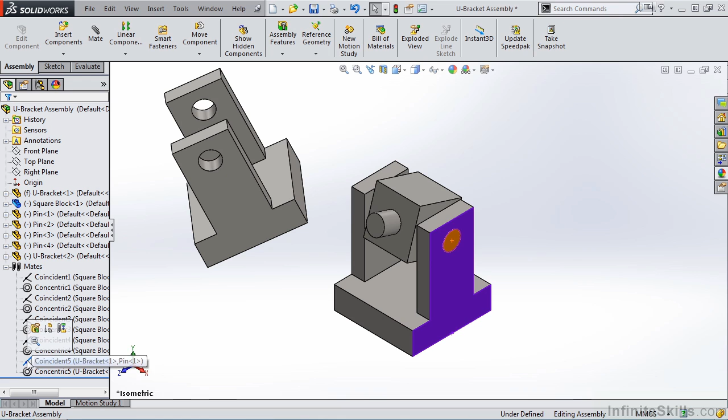If we expand the mates, you will see on the U-bracket, we have a coincident mate and a concentric mate. The coincident mate is mating the face of the pin and the face of the U-bracket. Let's suppress the coincident mate. Once we suppress it, the one mate we have remaining is the concentric mate.

So if I move the square block, notice we maintain the concentric mate. However, the coincident mate is suppressed. Now let's take a look at how to add a width mate. The width mate will allow this square block to stay centered within the legs of the U-bracket.

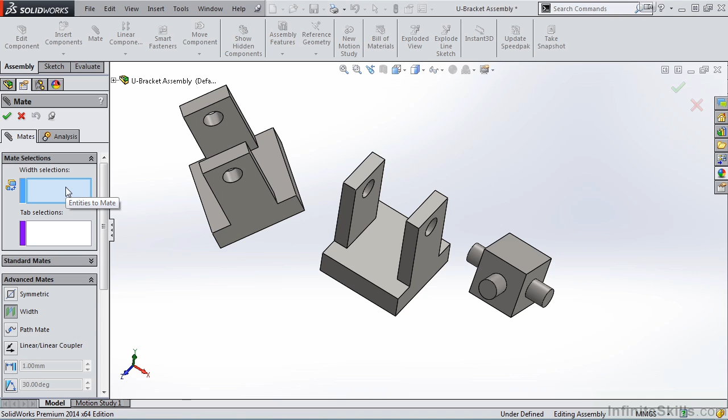So let's go back into the mate command, and I am going to clear this window. I will scroll down, select advanced mates, and then select the width mate. And you will see we have two windows, the width selections and the tab selections. You will select two faces for both windows.

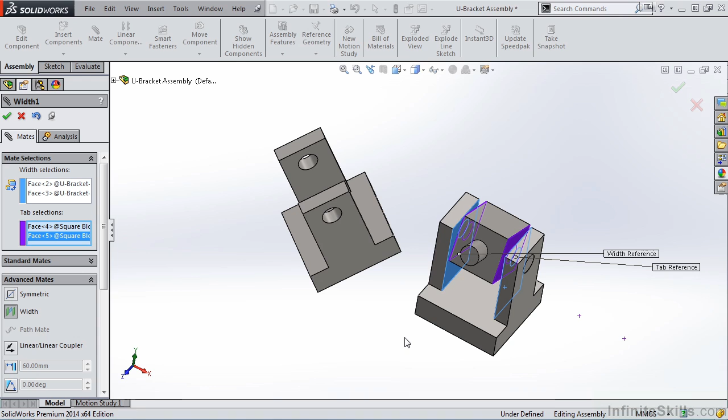So for the width selections, I am going to select the inside faces of the bracket. For the tab selections, I'm going to select the two faces of the square block. And now that square block is centered within the two legs of the U-bracket. So if the size of the U-bracket expands or something changes on the block, that block will always be centered within the legs of the U-bracket.

So let's go ahead and accept it. And now let's do the same for this upper U-bracket. First, we'll apply a concentric mate. That falls under standard mates. And let's go ahead and flip it.

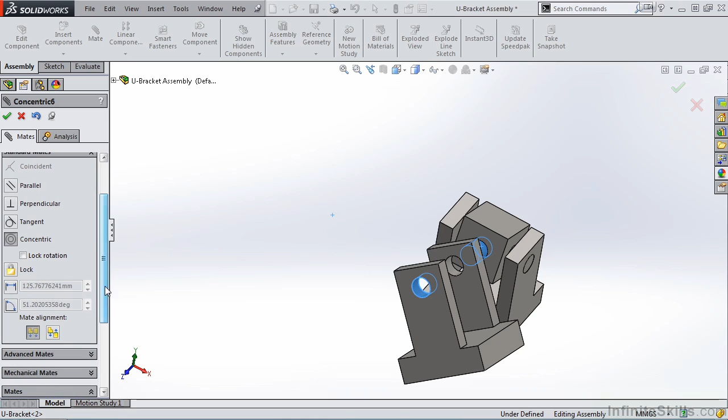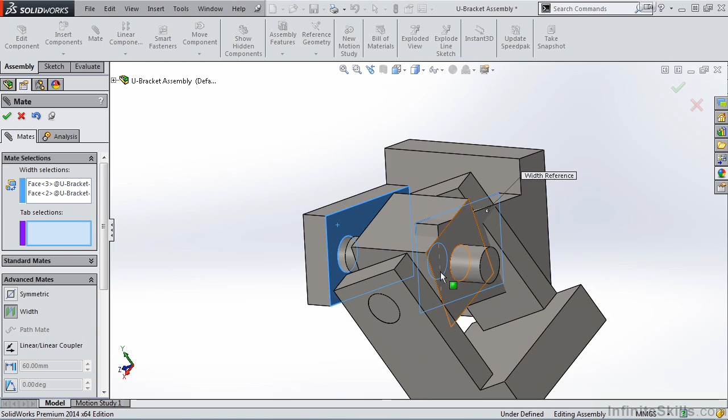There we go. And now we are ready for the advanced mate, which is the width mate. And once again, I am going to select the two faces of the U-bracket for the width selection. And then for the tab, I'm going to select the two faces of the square block. I will select the green check mark, close out of the mate property manager, and notice the U-bracket is centered around the square block.

Once again, we have a lot of assemblies that require this application. So the width mate, while it's easy to use, it is considered an advanced mate, but it's one of those mates that you should know how to use even in an introductory course.